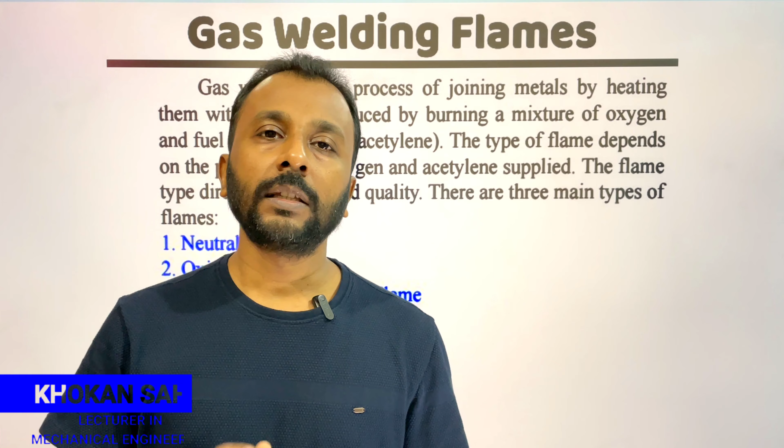In this video, I will be explaining about gas welding flames. So in gas welding, we are using the mixture of oxygen and acetylene in a perfect ratio, and by the use of this gas, we are creating flames, and by the flame, we are melting the metals to be welded, and after fusion and solidification we get the welding joint or weldment. That is called gas welding.

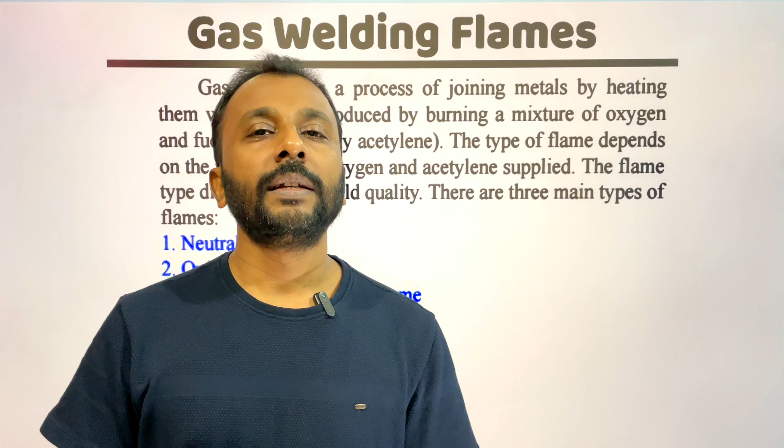So the flames we are using can be various types. In this video I will be explaining about the types of gas welding flames. There are three types of gas welding flames, that is neutral flame, oxidizing flame and carburizing flame. The flames depend on the ratio of oxygen and acetylene. The carburizing flame is also called reducing flame.

So the quality of the welding joint depends on the flames. Whether we are using neutral flame, oxidizing flame or carburizing flame, that flame decides the quality of the weldment. So firstly, the neutral flame. This is the figure of neutral flame. Here the oxygen and acetylene ratio is 1:1, so we are using oxygen and acetylene in equal form.

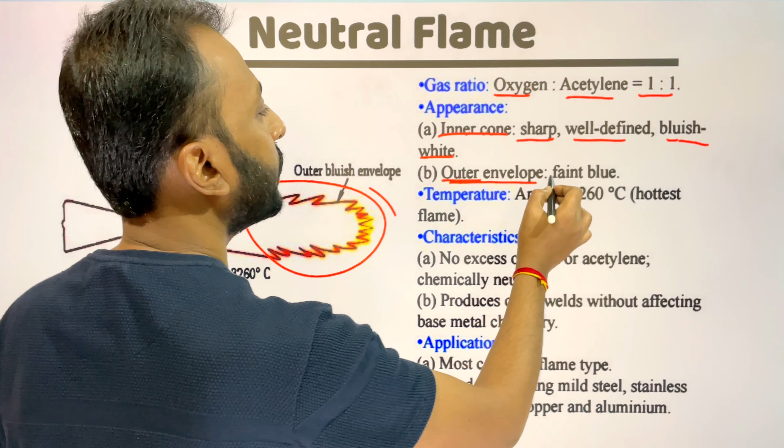So here we can see the flame, and the flame has two parts, that is inner cone and outer envelope. This portion is called inner luminous cone, and this portion is called outer envelope or outer luminous zone. The inner cone is sharp and well defined and bluish white in color, and the outer envelope is

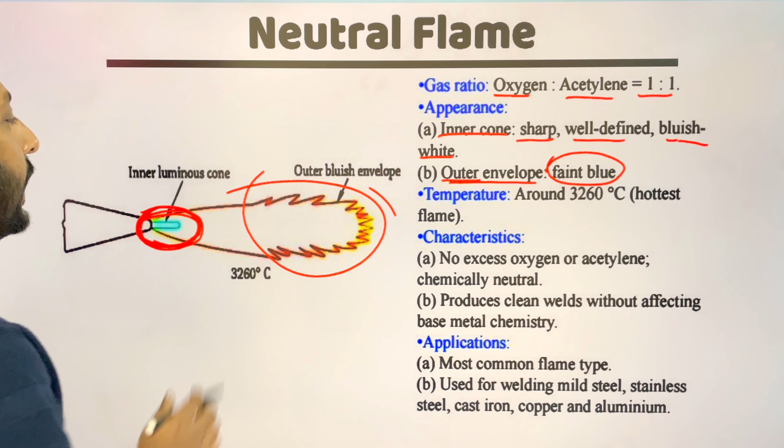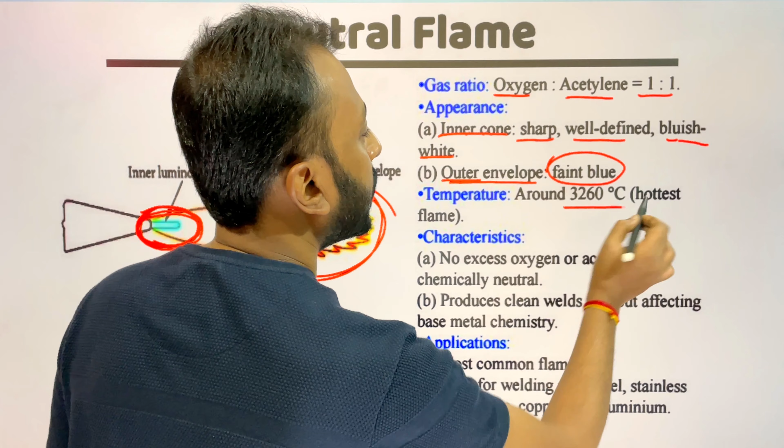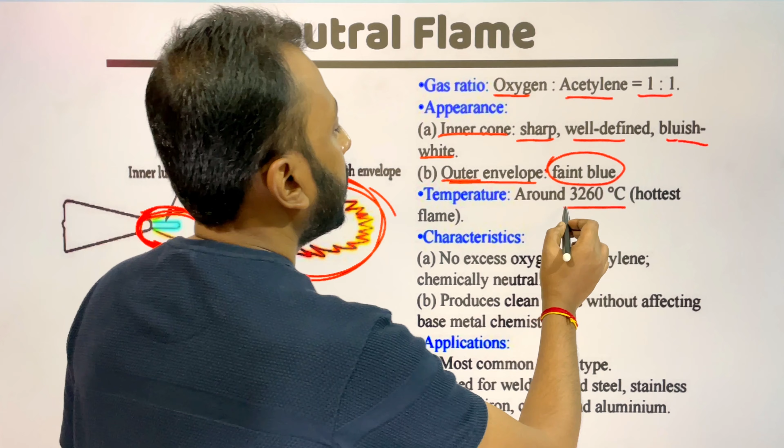faint blue. When we are doing the gas welding, this inner cone helps to melt the metals, and the outer cone only provides shielding, that is, it separates the welding zone from the atmosphere. The temperature is around 3260 degrees Celsius. When we are using oxygen and acetylene in the same 1:1 ratio, the temperature is very high.

So what are the characteristics? Here no excess oxygen or acetylene is required. It is chemically neutral because we are using oxygen and acetylene in the same ratio, and it produces clean welds without affecting the base metal chemically.

So what are the applications? It is the most common type of flame, and it is used for welding mild steel, stainless steel, cast iron, copper and aluminium. So we can use it to join various types of metals. This is the most widely used gas welding flame.

Next one is oxidizing flame. The name defines that the proportion of oxygen is greater than the acetylene, so here excess oxygen is used. This is the figure of the oxidizing flame, which differs from the previous one, the neutral flame.

Here we can see the small inner cone, because the acetylene is low and oxygen is high. The inner cone is small and the outer envelope is bigger, because the excess oxygen is burning and making the outer envelope bigger. The inner cone is short, pointed and very sharp. The outer cone is pale blue.

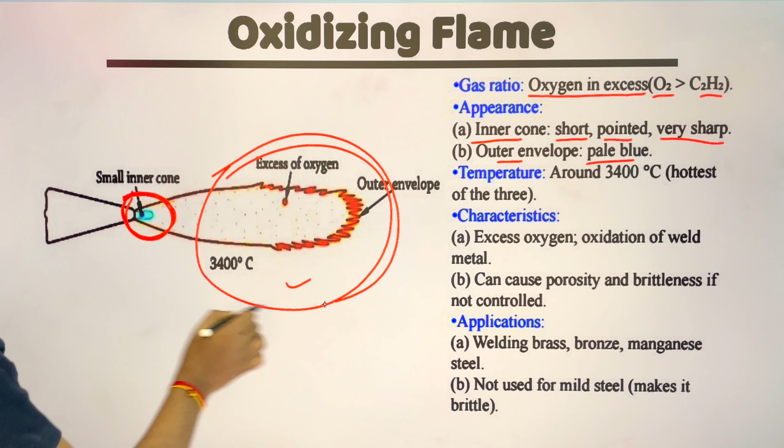Similar to the neutral flame, this small inner cone helps to melt the metals, and the outer envelope separates the welding zone from the atmosphere. The temperature is very high, 3400 degrees Celsius. Since we are using more oxygen than acetylene, the temperature is the hottest of the three.

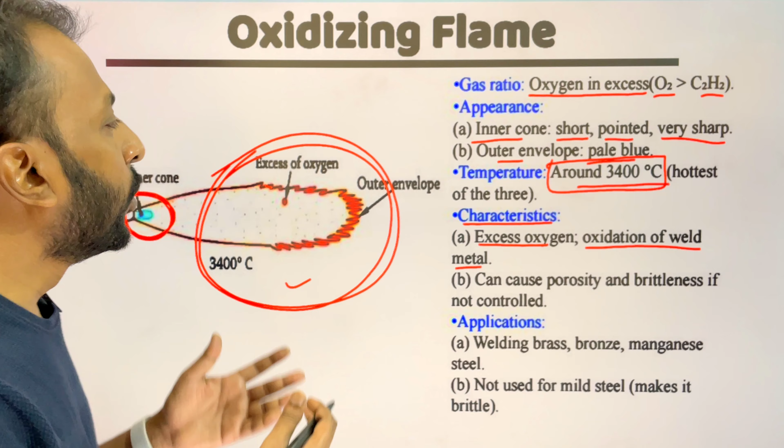Characteristics: excess oxygen, so oxidation of the weld metal may occur. Since we are using more oxygen and getting more temperature, oxidation may occur on the weld metal and can cause porosity and brittleness if the welding is not controlled by the operator. So we need skill to do this welding process.

Next, the applications. We can weld brass, bronze, manganese steel, etc. It is not used for mild steel; if we use it for mild steel, it makes it brittle. So this is the oxidizing flame, and it is the hottest among the three. In neutral flame we get 3260 degrees Celsius, but in oxidizing flame we get the highest temperature, 3400 degrees Celsius.

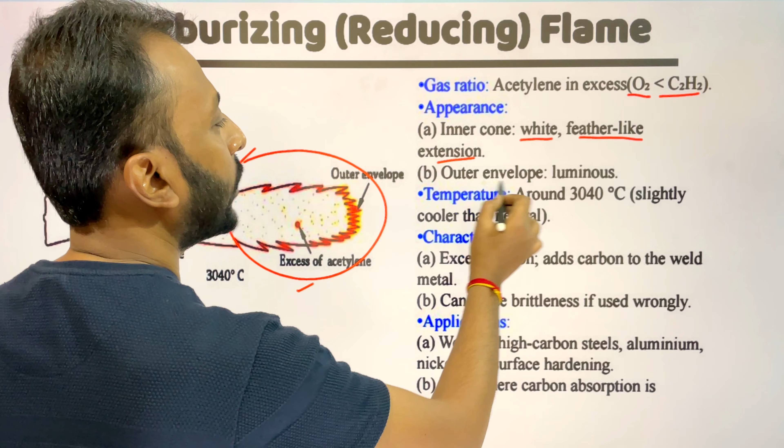The next one is carburizing flame, also called reducing flame. Here the acetylene is in excess and the oxygen is less. This is the figure of the carburizing flame. Here we can see mainly three zones: the inner cone, the intermediate cone, and the outer cone. The inner cone is white with a feather-like extension, and the outer envelope is the luminous zone.

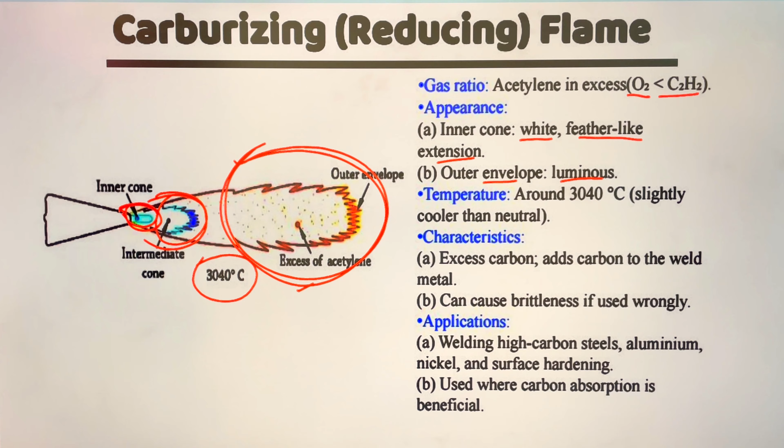The inner cone and the intermediate cone provide the accurate temperature to melt the weld metal. The temperature is about 3040 degrees Celsius, and the outer envelope, like the previous two, creates the shielding to separate it from the atmosphere. It is the lowest temperature among the three.

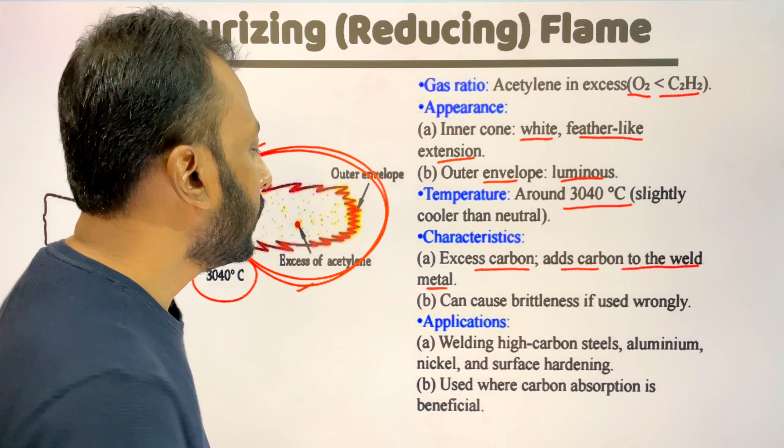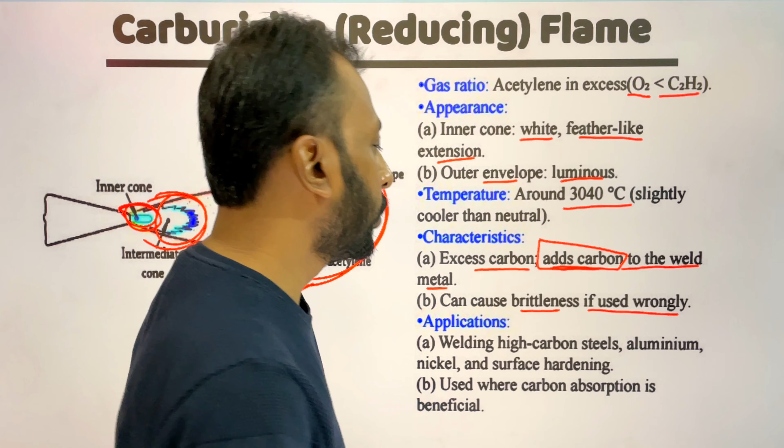What are the characteristics? There is excess carbon, so it adds carbon to the weld metal. When we use carburizing flame to weld carbon steel, the metal becomes carbon rich and stronger. But it can cause brittleness if used wrongly, because it adds excess carbon to the weld zone.

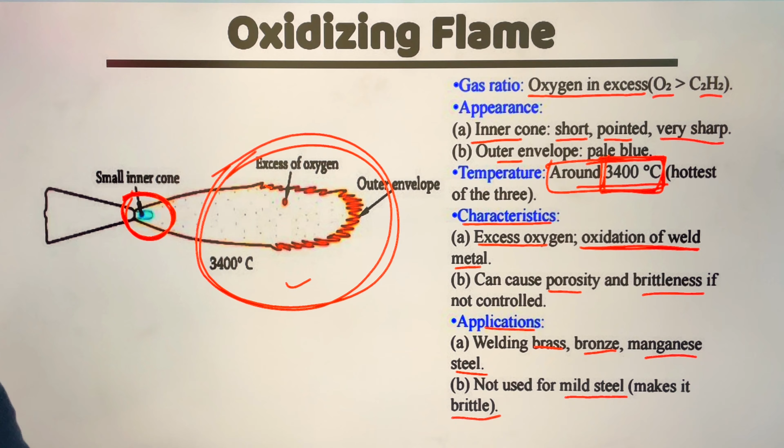What are the applications? We can weld high carbon steel, aluminium, nickel, do surface hardening, and it is used where carbon absorption is beneficial. When we need to add carbon to carbon steel, we use this carburizing or reducing flame. It is called reducing flame because we use excess acetylene and less oxygen, so the temperature is less. So this is carburizing flame, this is oxidizing flame, and this is neutral flame.

So in this video I have discussed the three types of gas welding flames.